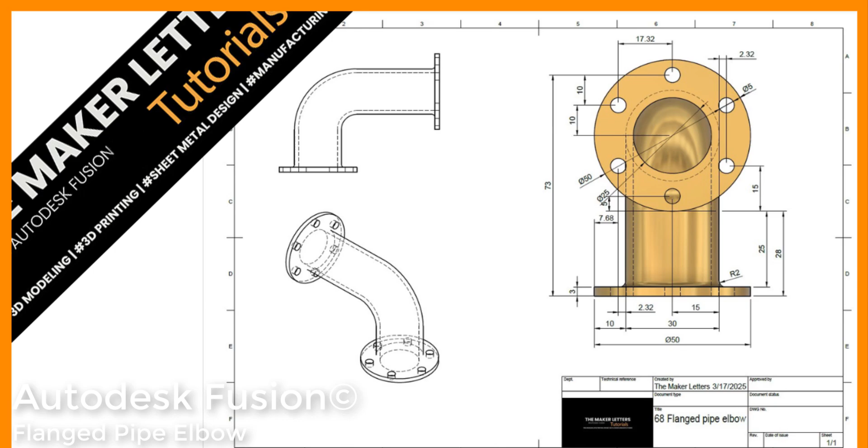We'll begin with efficient workflows to create this flanged pipe elbow, then explore both manual and automated methods to produce this drawing. Keyboard shortcuts appear at the bottom left corner whenever used. Let's get started by creating a new component. We'll begin within the activated component by sketching on the horizontal construction plane, starting with a center diameter circle.

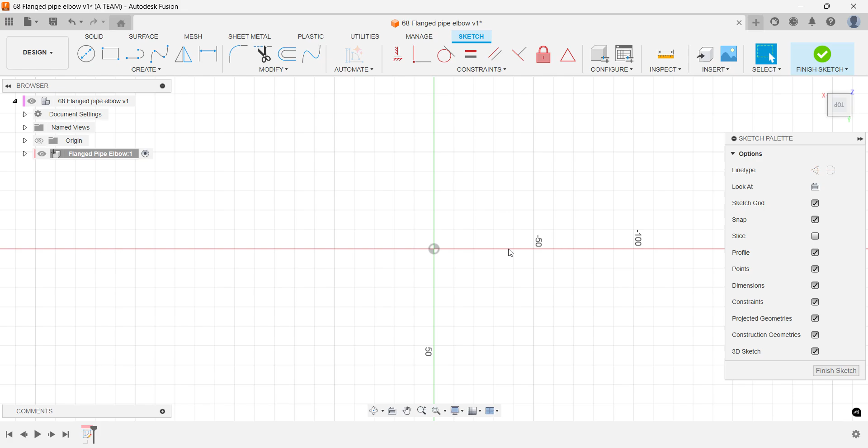The focus of this project is to demonstrate the workflow, so we won't be optimizing this pipe flange elbow for specific conditions, prerequisites, or design standards. Center your diameter sketch directly at the origin to take full advantage of a centralized design. We'll explore practical benefits of this approach later in the Fusion tutorial. The dimension I'm using, 50 mm, isn't critical to the workflow, so feel free to use your own measurements.

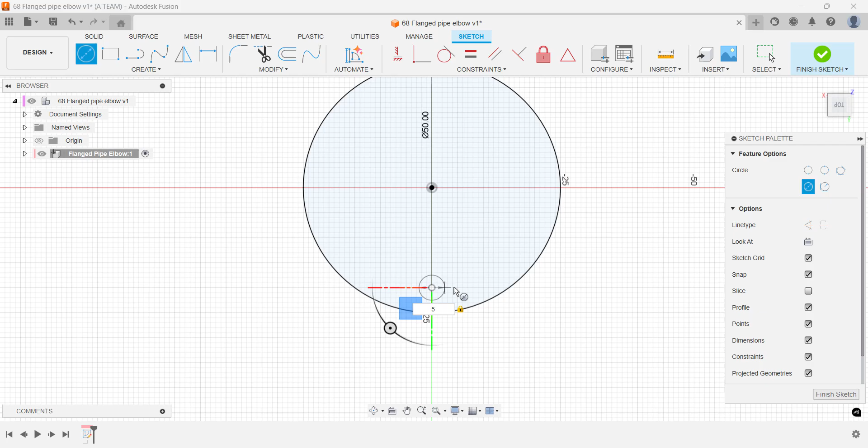The smaller circle represents the bolt holes for a secure connection. I'm keeping the sketch simple by adding just one circle. Later, we'll use a circular pattern to distribute the holes. Simplifying the sketch and relying on solid modeling commands keeps your design easier to manage and edit down the line.

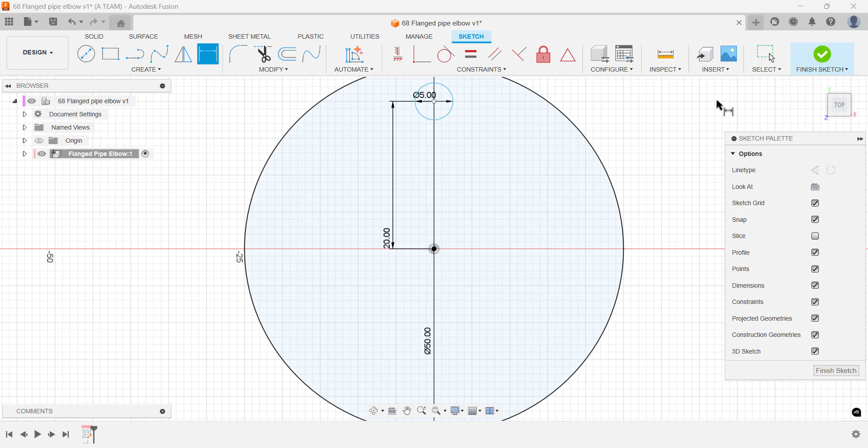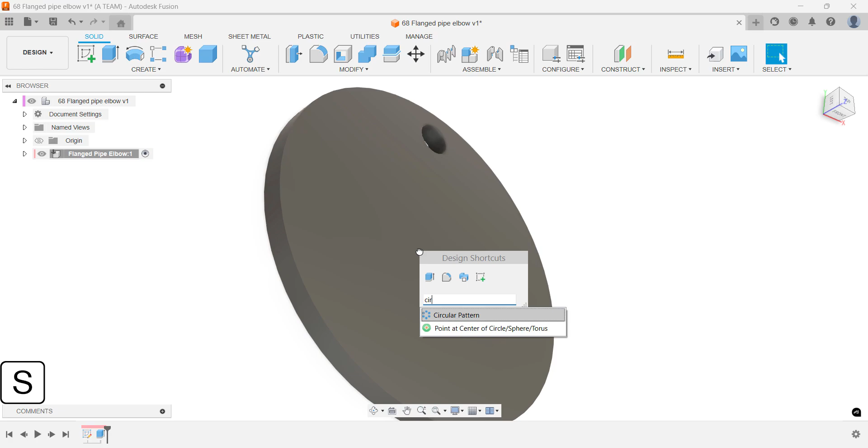Here's a quick time-saving tip. Jump straight from the sketch environment to the Extrude command using keyboard shortcuts. No need to close the sketch first. You can extrude in either direction and adjust the thickness to suit your design. To distribute the bolt holes, use the circular pattern with the object type set to faces.

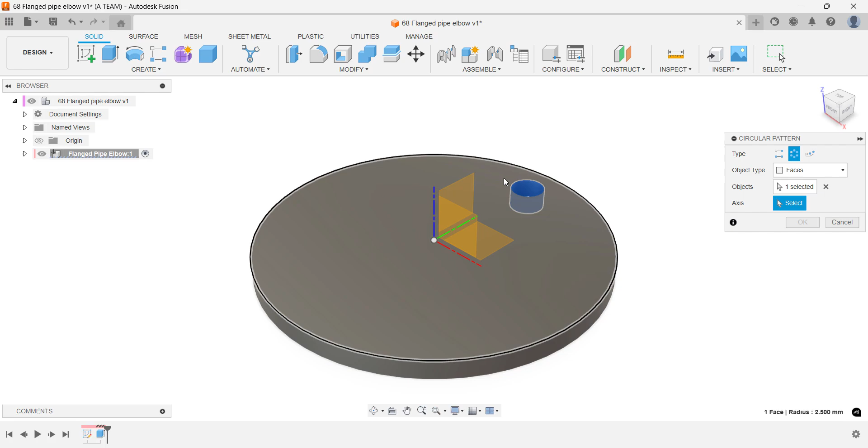It's easy to center the pattern around the model using the predefined blue axis at the middle of the design. If you're having trouble spotting the correct axis, use the Orbit tool or View Cube to reorient your view. I'll set the bolt hole count to 6 and keep the distribution set to full, ensuring the holes are evenly spaced. We'll start a new sketch directly on the solid body.

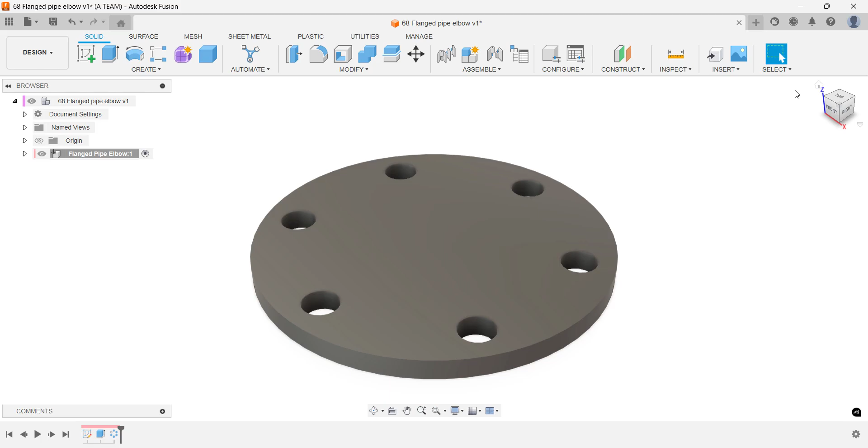This sketch serves two purposes: finishing the design of this part and setting up a connection point for assembling the two parts later in the workflow. Begin by sketching a circle for the hole. Then offset it with another circle positioned 2.5 mm outside the first. This way, if you adjust the inner circle, the outer one updates automatically.

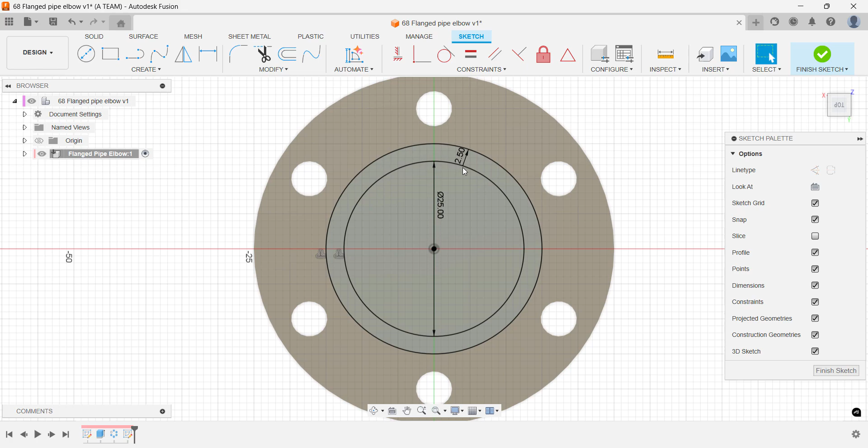For the extrude cut, I'll simply select the bottom face of the model, quick and efficient for a prototype like this. Make it a habit to check your model from different angles regularly to ensure everything aligns as intended. Next, we'll move and copy the body inside the component. Notice that we're working within the component itself. This is different from moving or copying the entire component.

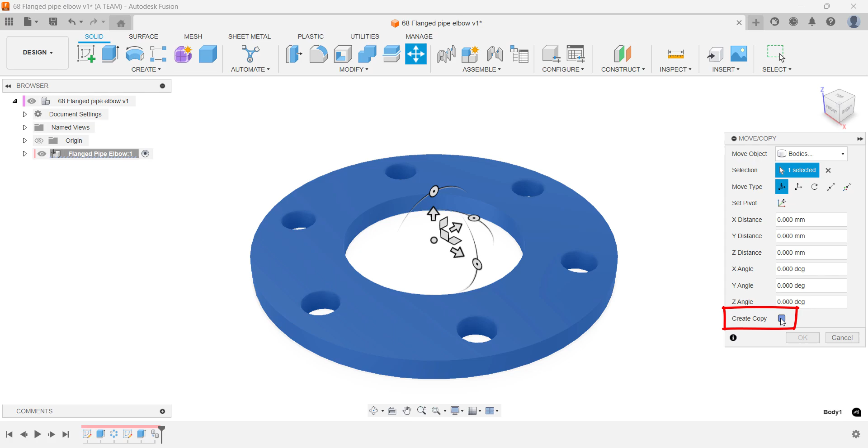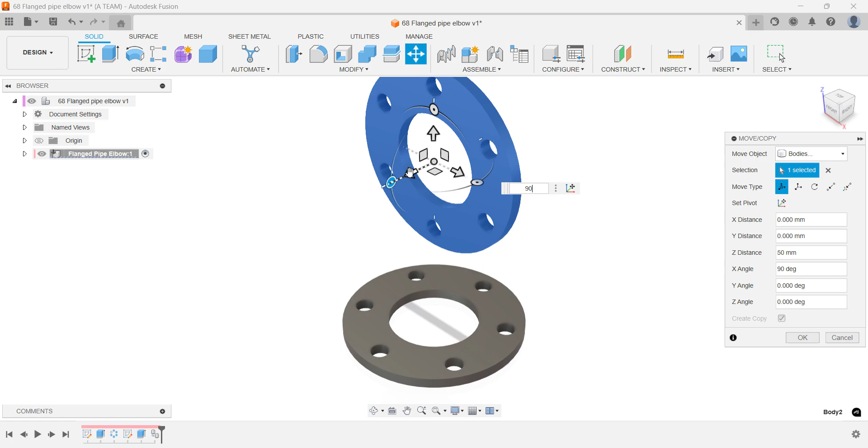Bodies versus components are outside the scope of this tutorial, but both workflows have their place depending on the project. For more detailed projects, especially those involving joints or parts you'd reuse in other designs, I'd recommend copying the base as its own component and creating a separate component for the connecting pipe, then connecting them with joints as needed.

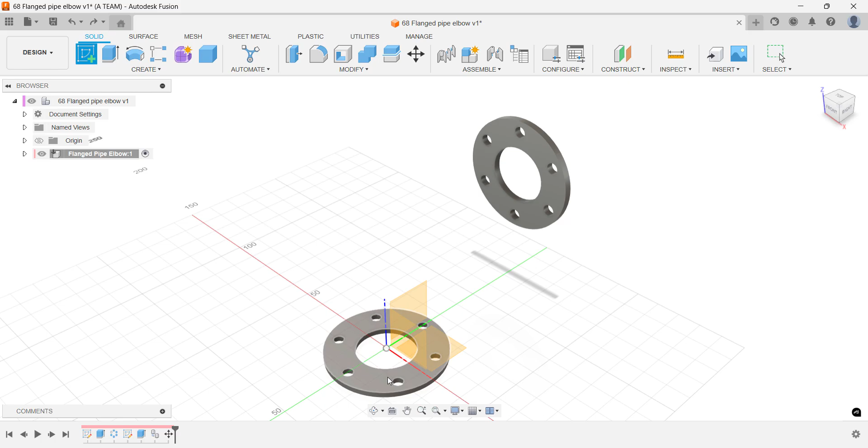The parts are neatly lined up and we'll connect them using a 3D sketch. I'm using the line tool because it snaps cleanly to the existing geometry, making it easier to connect the pipes with the solid body later. Of course, you can also use splines or arcs if that suits your design better. Don't worry if you don't hit the exact spot when sketching. Simply extend the line beyond the geometry and trim away the excess.

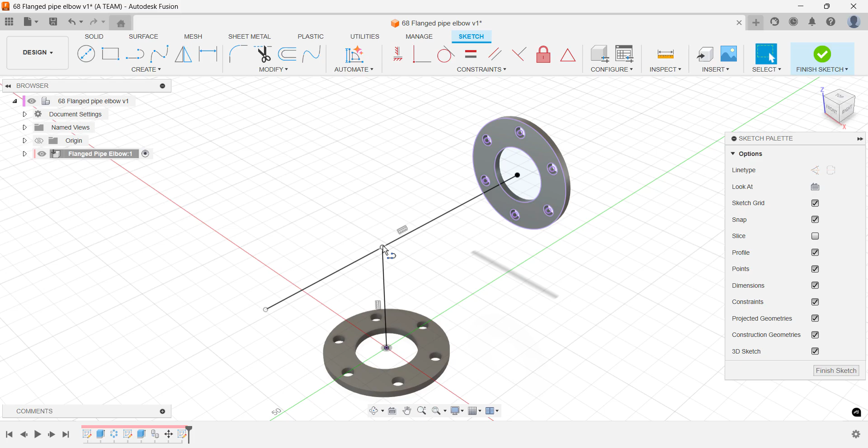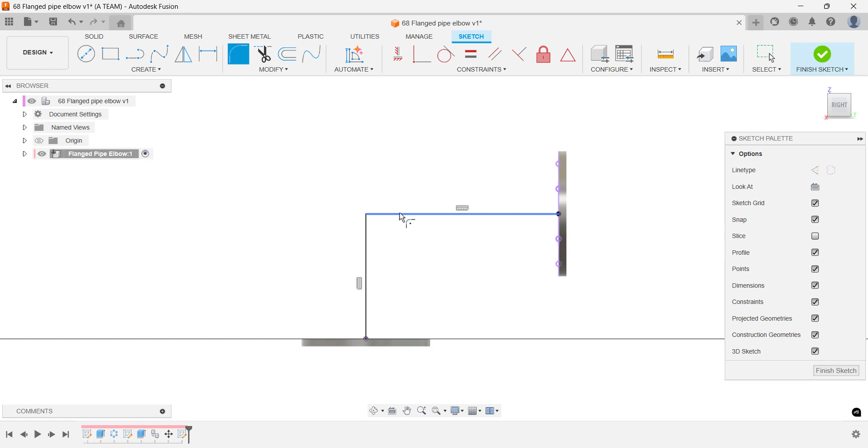The sharp 90-degree angle is just temporary. We'll refine it later to create a smoother radius. The keyboard shortcut F is assigned to the solid modeling Fillet command, so instead, I'm using the sketch shortcut to activate Fillet. A 25 mm radius works well for now, and we can always adjust it later through the Fusion timeline if the solid model doesn't look quite right.

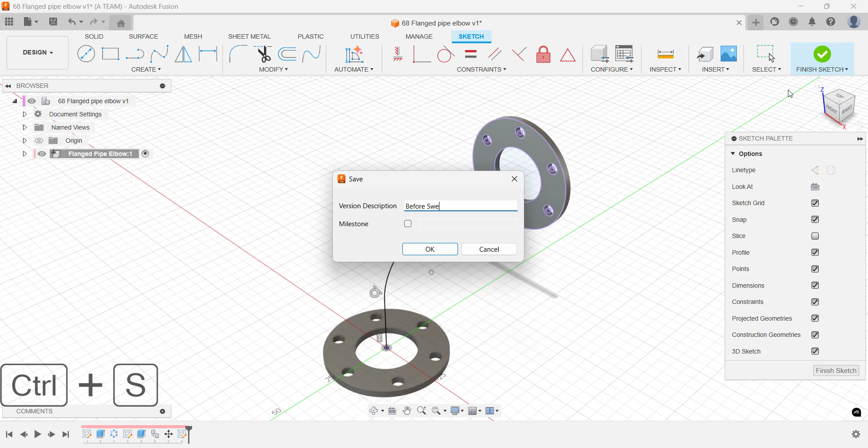Now is a good time to save your project. The version number will automatically update once you continue working after saving. Make sure Sketch 2 is visible before activating the sweep command. We'll use the offset circle created around the 2-minute 30-second mark.

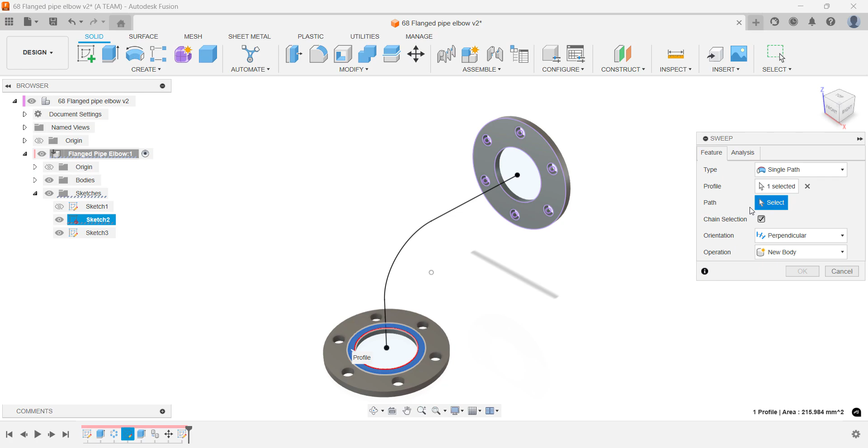Since we're working with a closed profile, we can use the solid modeling sweep, just select the profile and the path. I'm leaving this as a join operation, but as discussed briefly regarding bodies versus components, there are other workflows that might be more optimal depending on the situation.

A quick check from different angles confirms we're on the right track. It's always a good idea to inspect your model like this, especially when using 3D splines. While splines offer more flexibility and precision, in my experience, they're also easier to misplace compared to simple lines when 3D sketching.

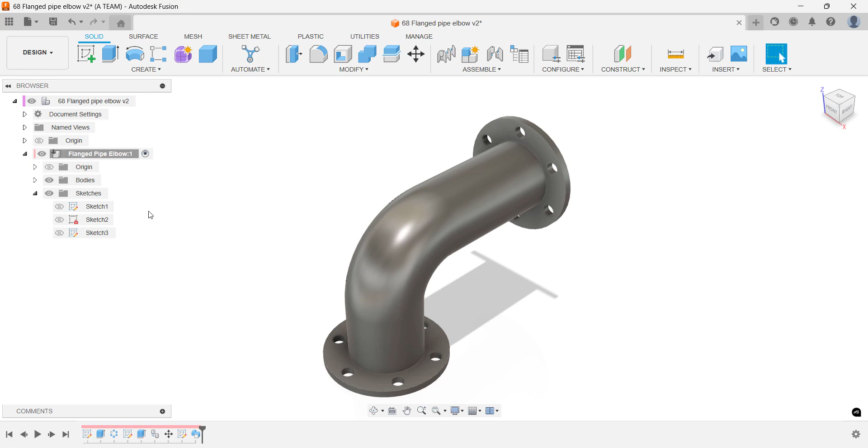A polished brass appearance will look great, and since everything is joined into a single body, we only need to apply it to that one body. These fillets will give a welded look. If we were making a real product instead of a rapid prototype, we'd need to ensure the bolt holes aren't too close to the welds. This simple detail adds a realistic touch to a welded design.

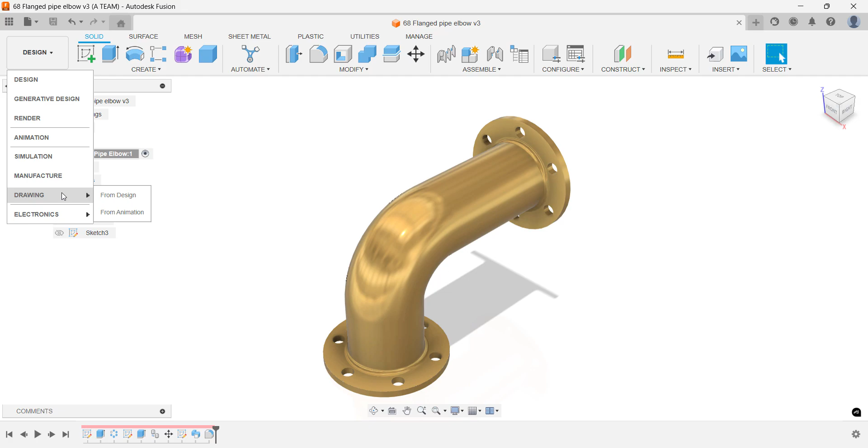As for the drawing setup, Fusion offers both automatic and manual drawings. You can start from scratch or use a template. In this tutorial, we'll create a manual drawing but incorporate some automated parts, so stick around. The drawing opens in a new file, which makes sense given its purpose. You can place a base view anywhere on the sheet and adjust appearance settings like orientation, style, and scale easily.

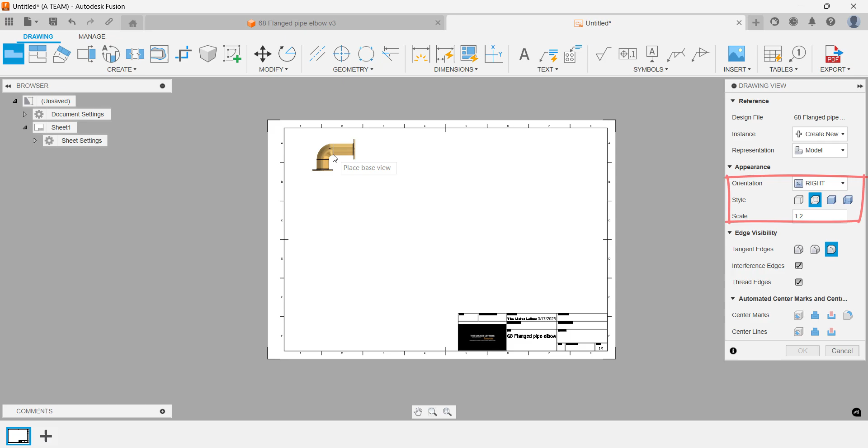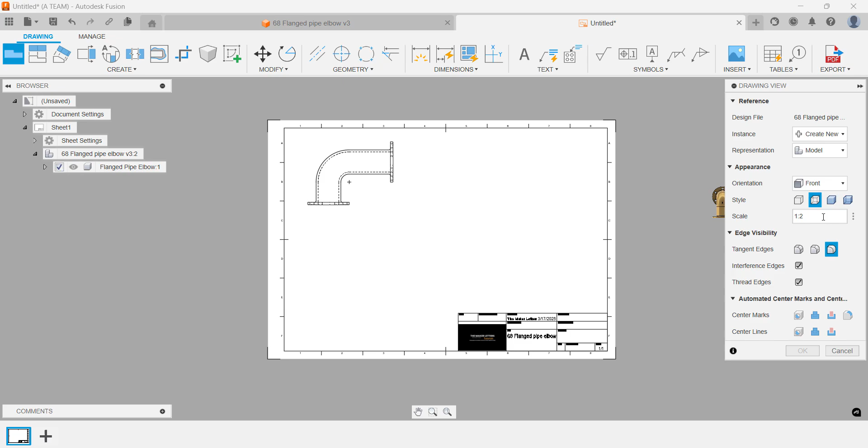Note that the style setting updates automatically after placing the view. We're keeping things simple here, focusing on a basic drawing without diving into all the advanced options. That's a topic for another time. To add another base view, just click the base view button in the top left corner. You can continue adjusting the settings even after placing the base view on the sheet. Let's fast forward a bit while briefly demonstrating the different orientation settings.

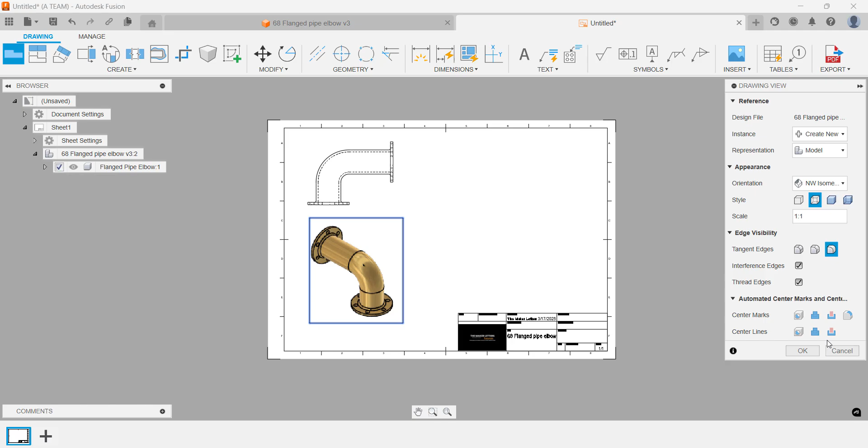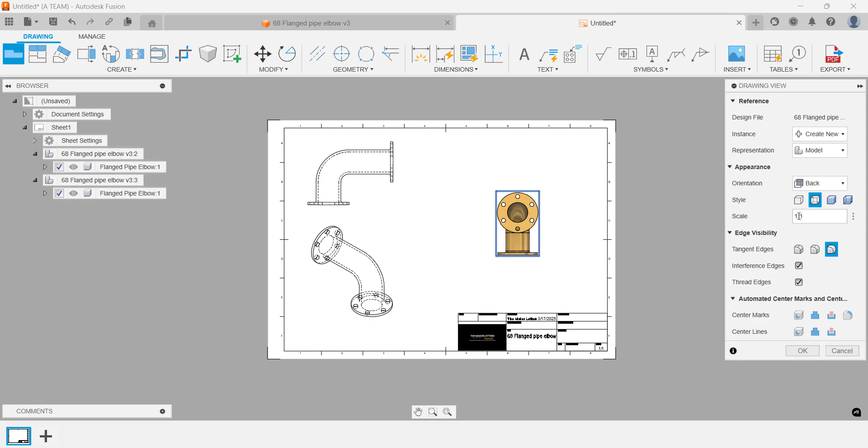Let's add a final base view with a 1:2 scale and a solid appearance. This clearly highlights our design from this perspective. To edit the view, simply click it on the sheet to reopen its settings. The shaded style displays the brass appearance nicely, and the shaded with hidden edges option can be helpful for a clearer understanding of the model's structure.

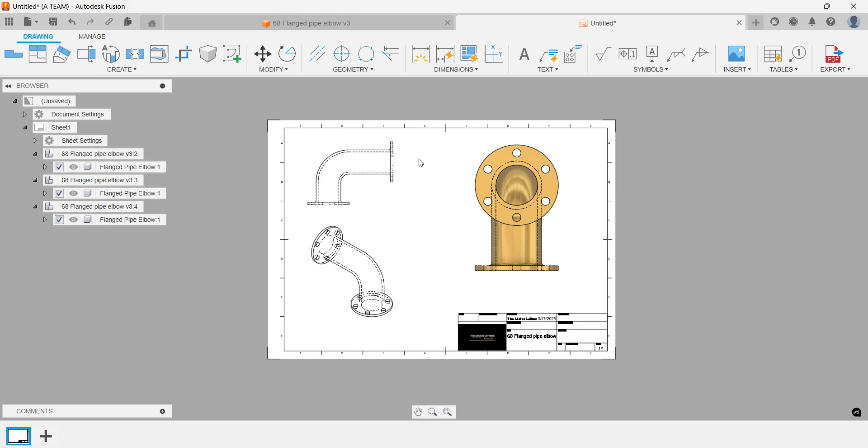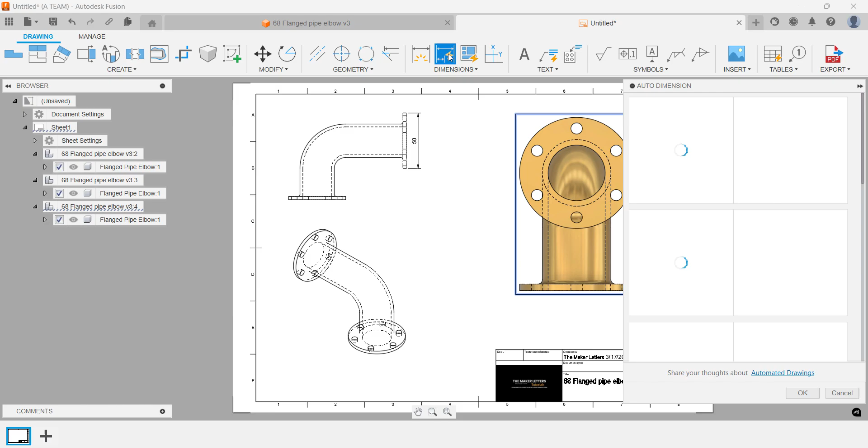Great job following along. Let's wrap this up by adding manual and automated dimensions. Manual dimensions are just as easy to place in the drawing workspace as they are in the modeling workspace. Simply select specific points or angles. Auto dimensions offer different setups. Choose what fits your design best. You can also adjust the density of dimensions, meaning the number of dimensions shown, scaling it up or down as needed. We're not diving into whether these dimensions are ideal for this particular design. The goal here is to show useful tips and tricks.